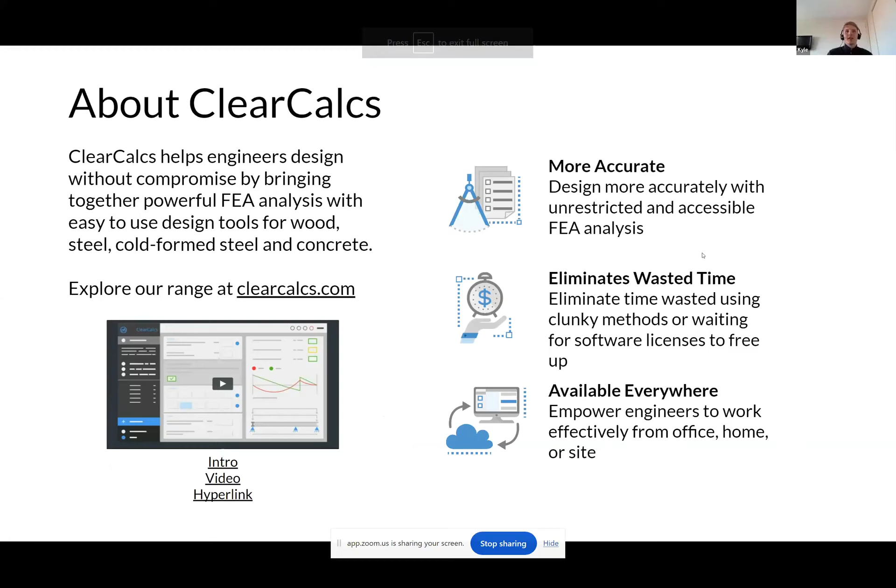So thanks everyone for tuning in. As I said, my name's Kyle, I'm a project manager with Aus Engineered. We've worked with ClearCalcs for about 18 months now, on a range of different sort of projects, and I've been using ClearCalcs. We've been using ClearCalcs at the company I work for about over a year now. And Ati sort of said, hey, why don't you share one of the projects you've used ClearCalcs on, and go through the design procedure you've done, and it might be useful for other people.

So enough about me, let's get into the presentation. For today's agenda, I'll start by introducing the project. A lot of builders and a lot of clients reach out, and it's always about adding space, renovation projects.

So whether they want to add a room, extend the property, add another story, knock out a wall to add more living space, it seems like with population density and things like that, there's going to be a lot more space addition projects coming up.

And this particular project that we worked on was a creative way to add space into a loft apartment, somewhere that it's often quite tricky to add space.

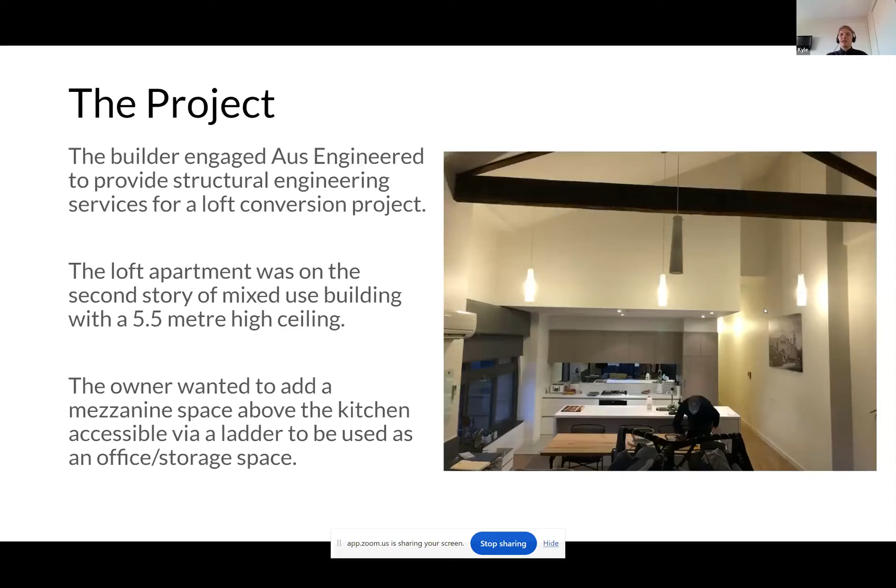So we were engaged by the builder quite early, so we were able to participate in the concept design. And so there was also an architect on board and a town planner as well. So as a team, everyone was involved in the concept design, which was really good.

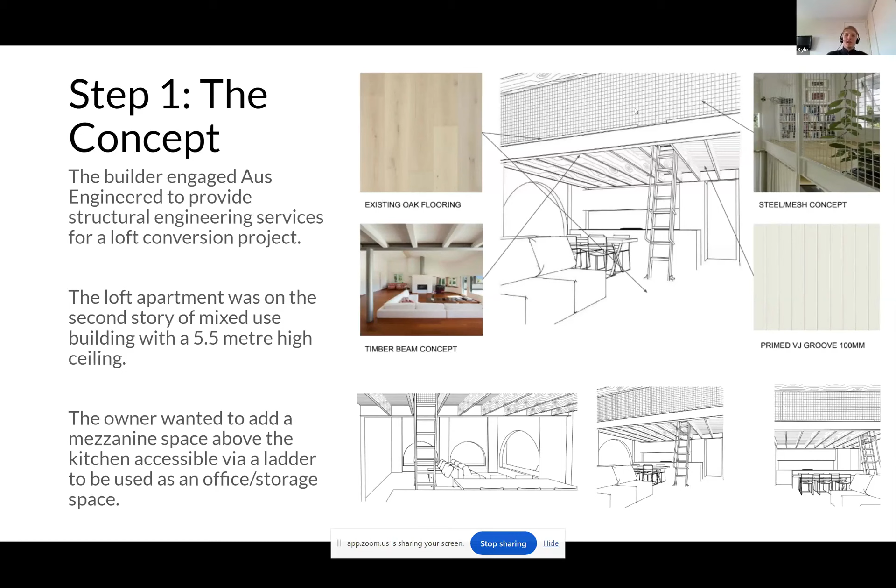So the next part, once we had a concept of what the client wanted, was to assess the information available. Often with these renovation projects, it can be really difficult to get good quality information about the existing structure.

Often buildings are quite old and the record keeping on them isn't great. And that's the same for commercial buildings. Even though they're managed by body corporates, often they change. The building will be managed by different body corporates over its life. And the as-built drawings for the structure aren't often maintained very well.

And often that can be a deal breaker for us when we take on a project like this, because there's inherently a lot of risk associated with modifying an existing structure.

So we engage the body corporate early to understand their requirement for private building works, because it does vary between body corporates. Often they'll have a procedure and a list of requirements that they need the builder, engineer, or architect to have, to be able to make those modifications, and then they'll list the documents they require for you to make modifications to that building.

Fortunately, in this case, we were able to secure existing structural and architectural drawings from the body corporate, which were very informative in the design.

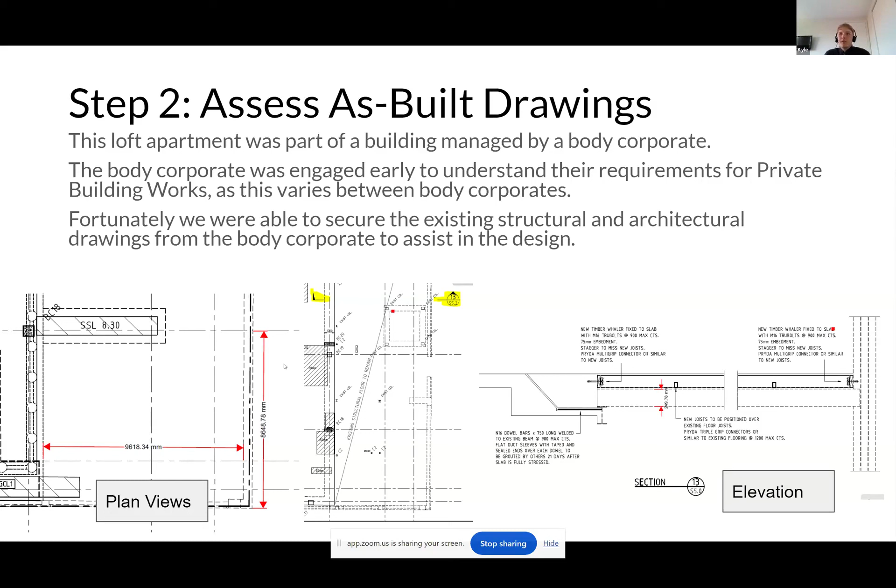So we were able to go digging and work out the span of the existing slab that the apartment was on, as well as the vertical columns and supporting members, their orientation, and based on the as-built drawings, assign a capacity to the slab, and work out whether it's even possible to add additional loads to the slab from adding in an additional space.

So once we had those drawings, we felt, and did some site investigation work, we felt quite confident that we could achieve the project, which was good.

Often, in a case where we wouldn't have these drawings, there are other methods you can do. You can go and conduct on-site measurements, look through the structural members, look through manholes. You can do non-destructive testing like scanning for reinforcement and things like that as well. I guess the challenge with those are that it's expensive, and often there's a lot of sunk cost that goes into those investigations.

And it's possible that you can't even achieve what the client wants. So it's really important to keep them informed, if you are going down that path of, okay, we've got no drawings, we need to verify what these members are, and if there's sufficient capacity, to keep them informed that we'll assign the capacity of the existing structure, but we can't guarantee that your renovation will be able to be facilitated. Because often, clients can get grumpy when you come back and say, here's the bill for all the investigation work, but sorry, we can't do your renovation. So it's just important to manage that relationship and be clear about the risks associated with any project.

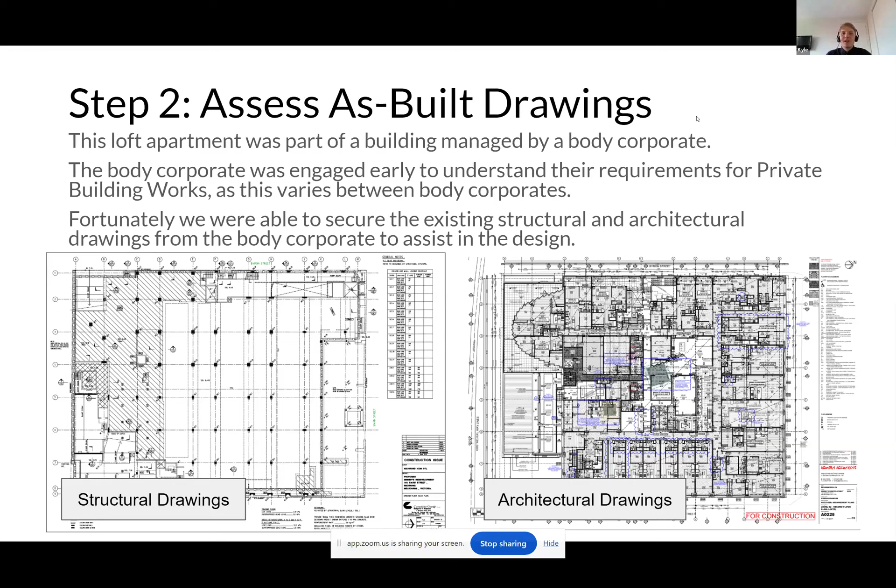It's important early as well, before you tuck into the design, to consider council, shire, or planning laws. Depending on the use case for the space being added, planning permits requirements can be triggered. Be sure to consult with the local council about the project and engage a town planner to assist with any required planning applications. We don't do any town planning ourselves. We leave that for the experts, and ensure they're engaged for the project when we feel they're required, in consultation with the builder and the client.

Often adding storage space such as non-habitable rooms can be exempt from planning permits depending on where they are, but the loads required for storage calculation as per AS 1170 are often much greater than general use spaces. So that's just some important things to consider depending on the use case of the space.

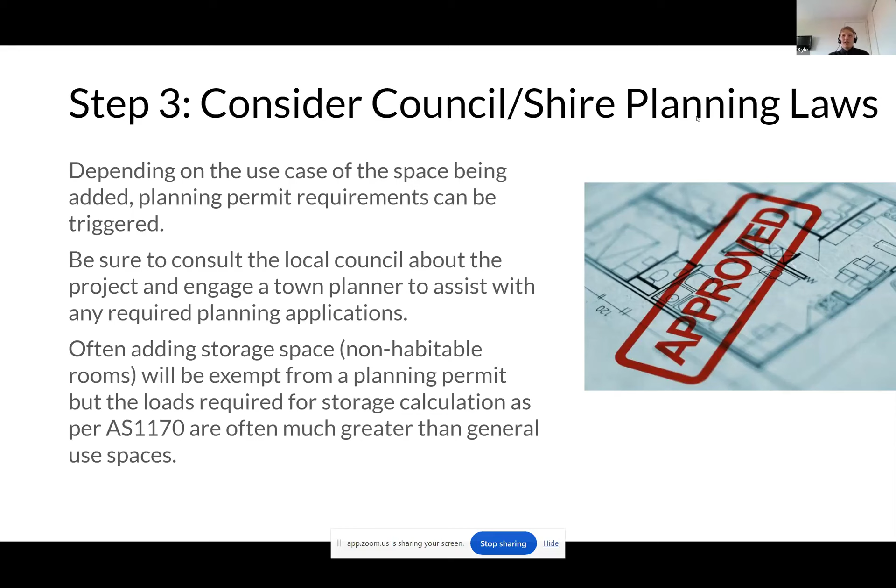So once there was confidence that there was sufficient structural capacity that the planning laws would permit the construction, a qualified architect was engaged to draw up some plans. And we received these draft copies of what beams and columns required specifications by the engineer.

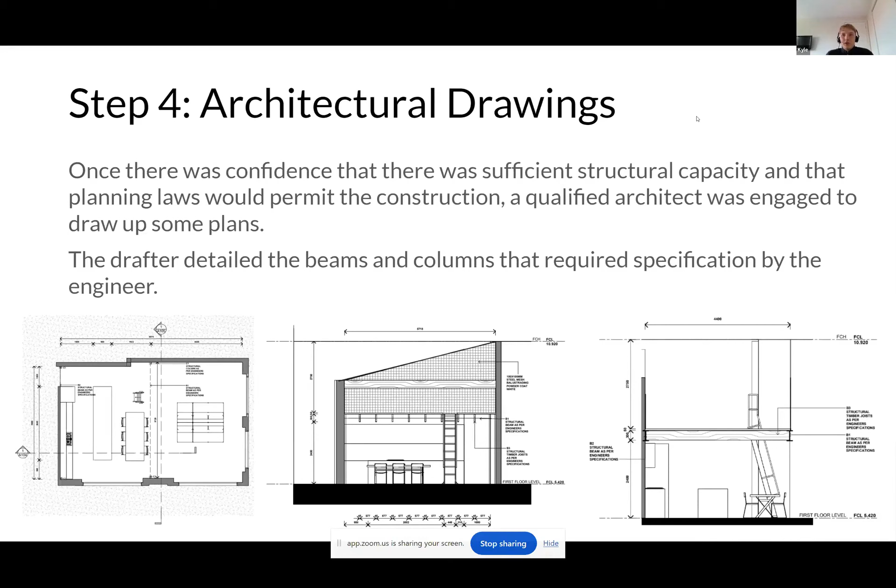So then in terms of going into the actual design procedure for the members, determine the loading requirements, which stems from the use case of the space, which is quite easy, just using AS 1170.1.

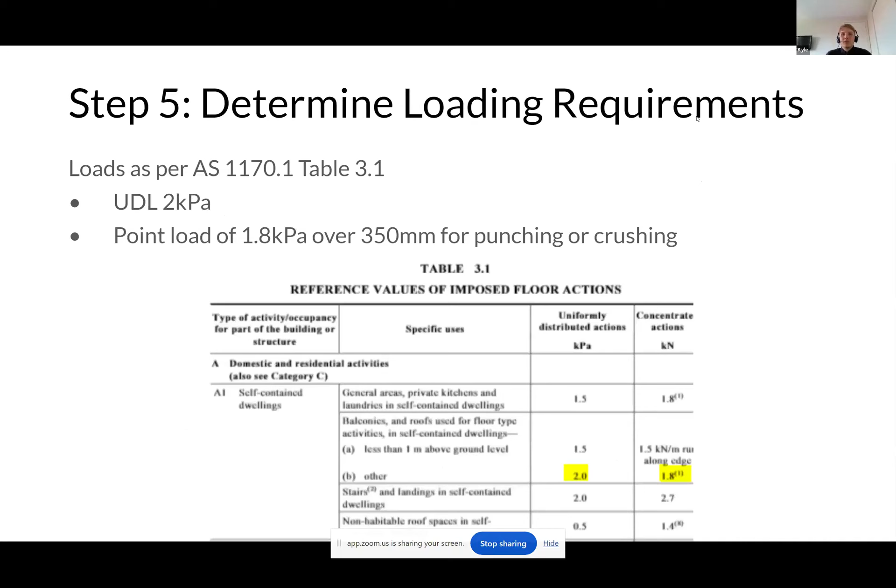And then we jumped into designing the primary beams first. So we did that using the tributary width of the new mezzanine area and calculating the load that would be attributable to the new primary beam for the new space.

That allowed us to specify the loads into this ClearCalcs steel beam calculator, which was then used to find the most structurally efficient member. I'm happy to show you our ClearCalcs output.

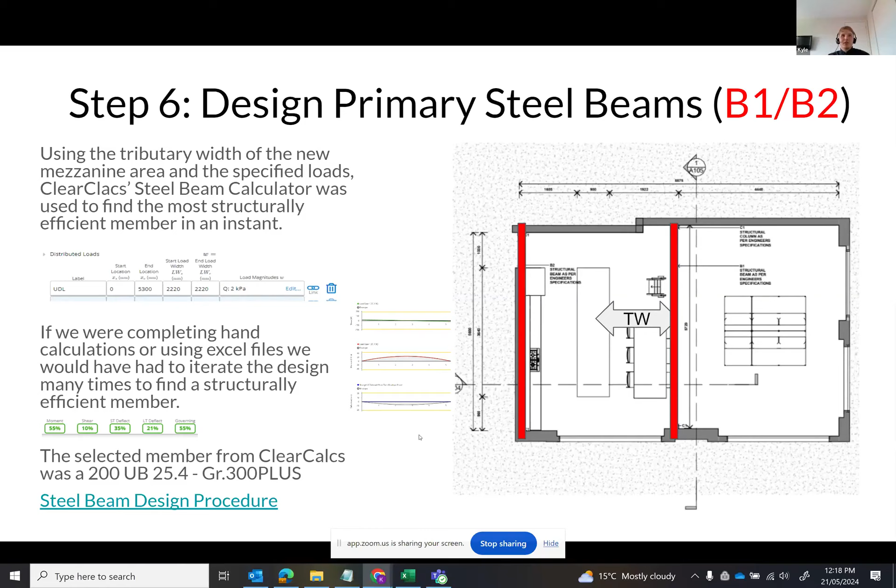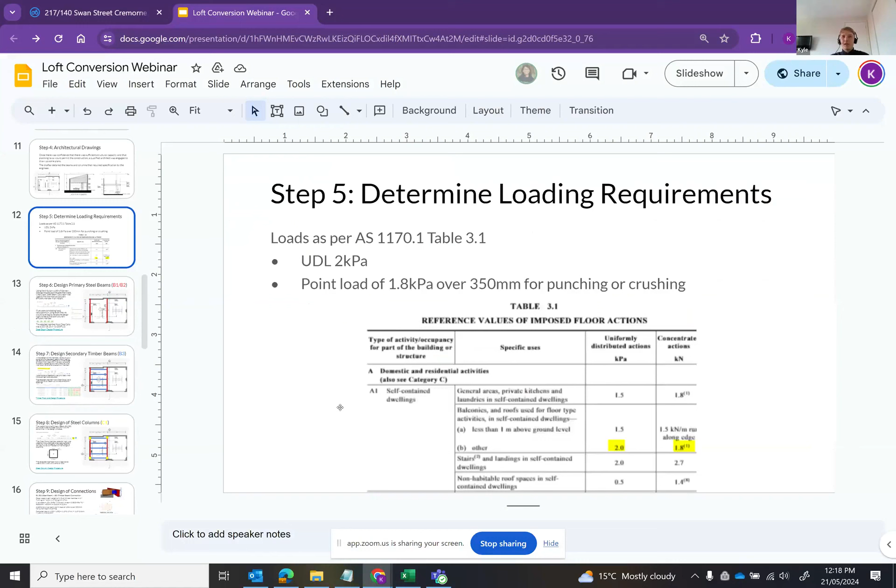Just to note, there is a link down the bottom of these slides that will be sent around that goes into detail the design procedure for steel beams for each member that we talk about. I'm not going to cover each of them in detail just due to time, but those links are pretty useful. They're being prepared by ClearCalcs, so they're very good to follow.

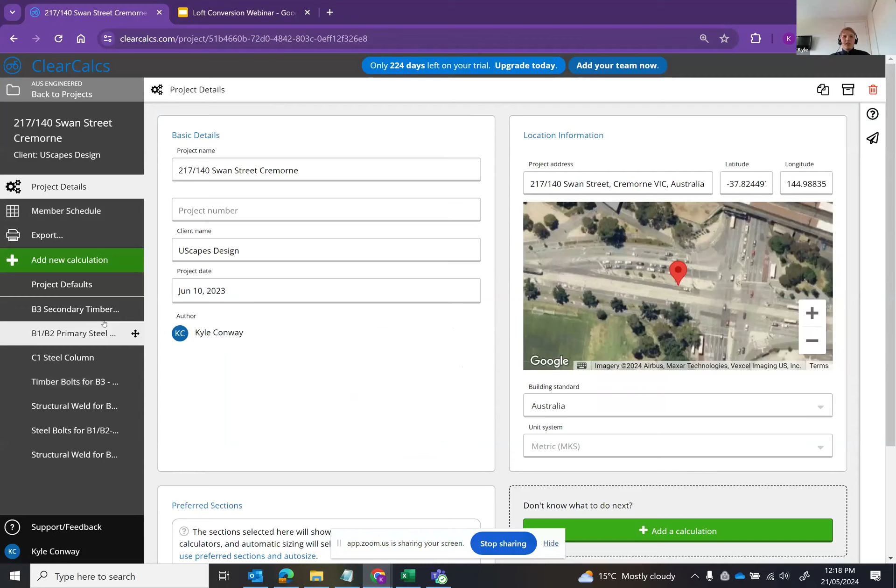So I'll just jump in. This was our project that we created. We had the address in, the client, and then we have all of our calculators in here that help us design these members much more efficiently.

So the member in question was the primary steel beam, or B1/B2. We were able to come straight in, input the dimensions from the drawings. We were able to input the dimensions of the beam that was required.

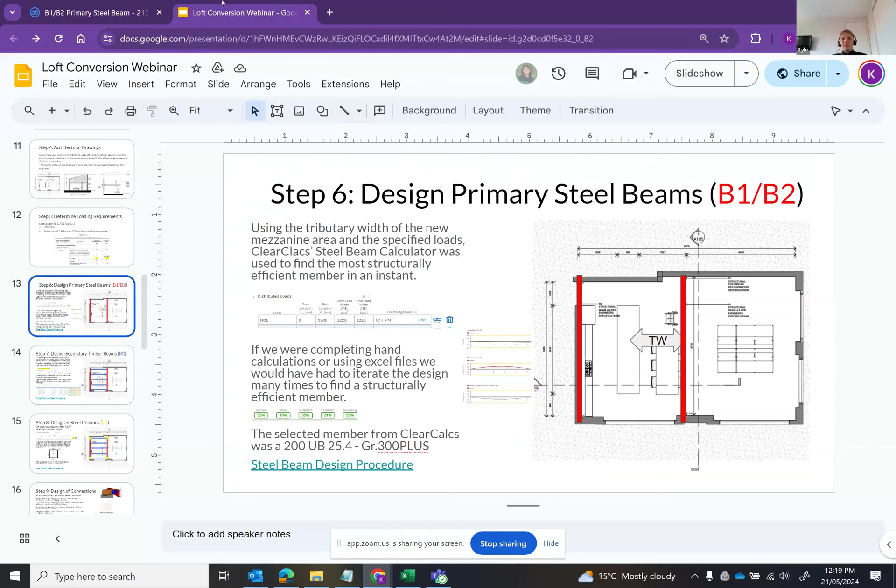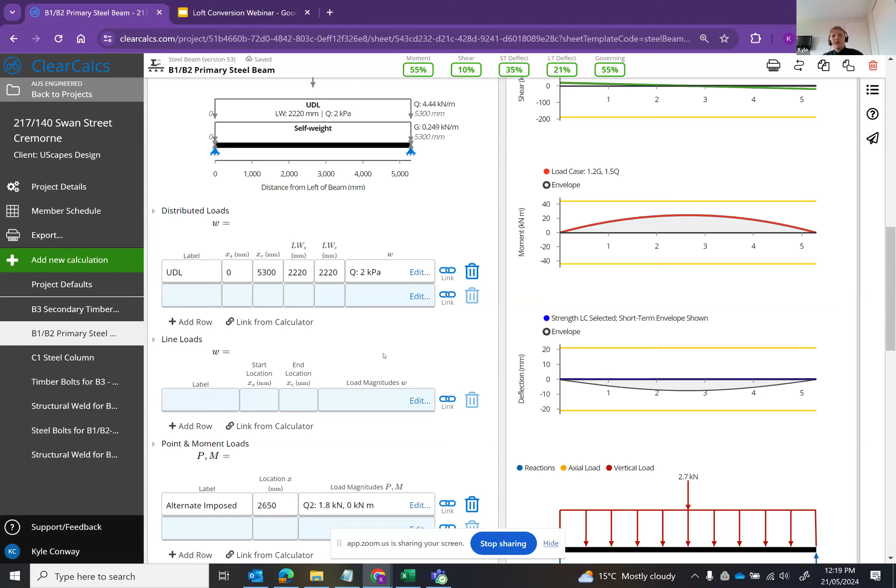So in terms of span, the length of bearing that the beam would have, and also input the loads that were determined according to AS 1170.1. We could also put in the tributary width of these loads, which is really convenient rather than performing all those hand calculations for those distributed loads, and also add in point and moment loads, as well as the beam orientation. So quite easy to input.

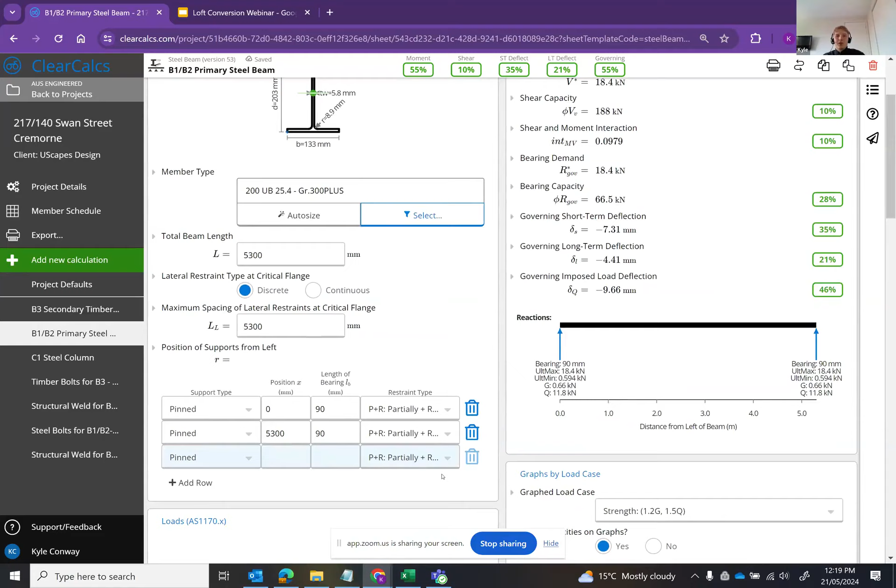It spits out a nice little diagram here that shows what loads are applied to the beam. And then we also go through and check all the other parameters for the beam calculation. Most of them can be left as default if you set up your project defaults according to Australian standards. But it's important just to check each of them and ensure that they are suitable for this beam.

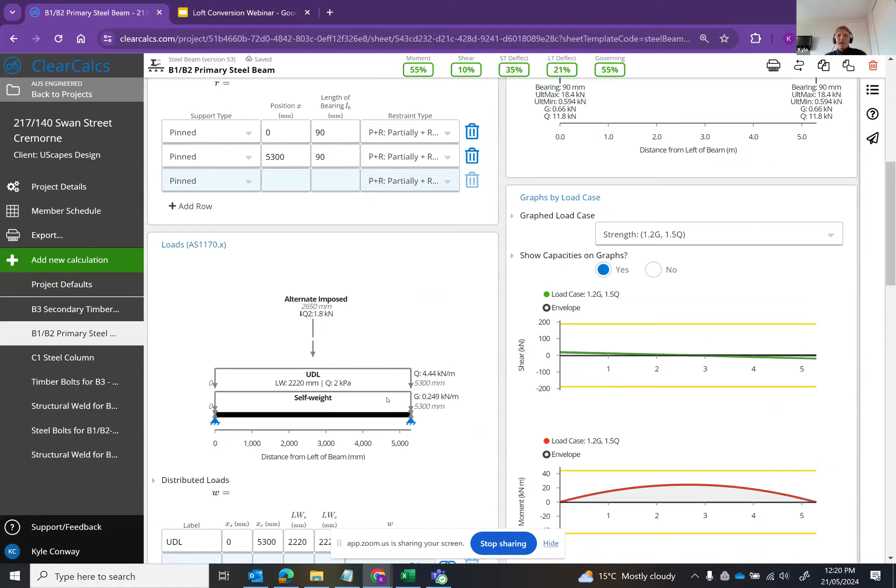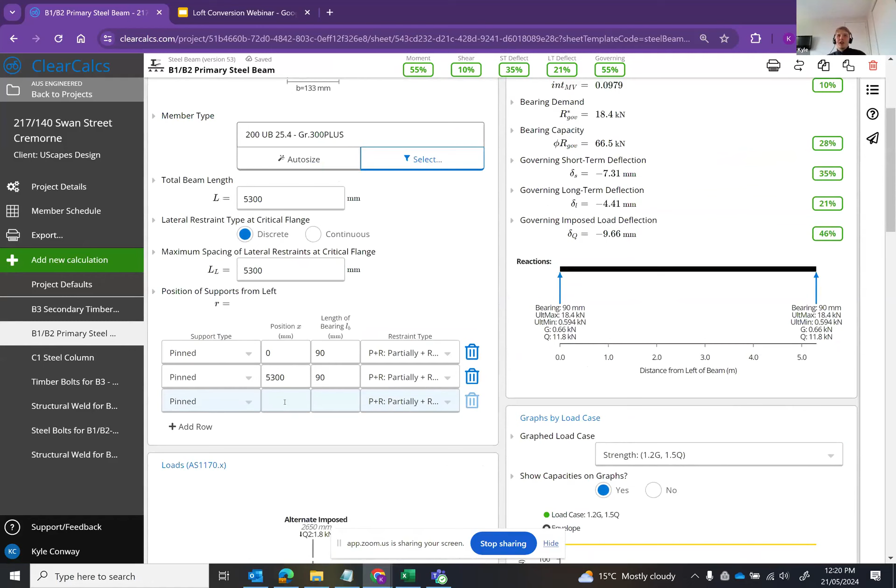What we really like about ClearCalcs is you put all the inputs in and you get instant feedback through the traffic lights. Depending on the utilization of the beam under the loads input, you'll get a green if the beam's adequate, orange if it's nearing utilization, or red if it's overutilized. You can go through and change parameters, and it'll instantly update the utilization percentages via the traffic light system. We find that really fast.

If I go through to the secondary beam - the reason we designed the primary beam first was because in order to achieve the vision the client wanted, the secondary beams needed to bear on the bottom flange of the universal primary beam, sitting flush against the web and bearing on that bottom flange. This was for a few reasons: one, for aesthetics, and two, they didn't want too much reduction in ceiling height. So that was why the primary beam was designed first, and once that was sized, we knew the secondary beam couldn't have a depth greater than 200 millimeters to ensure it could fit into the flange of the primary beam B1.

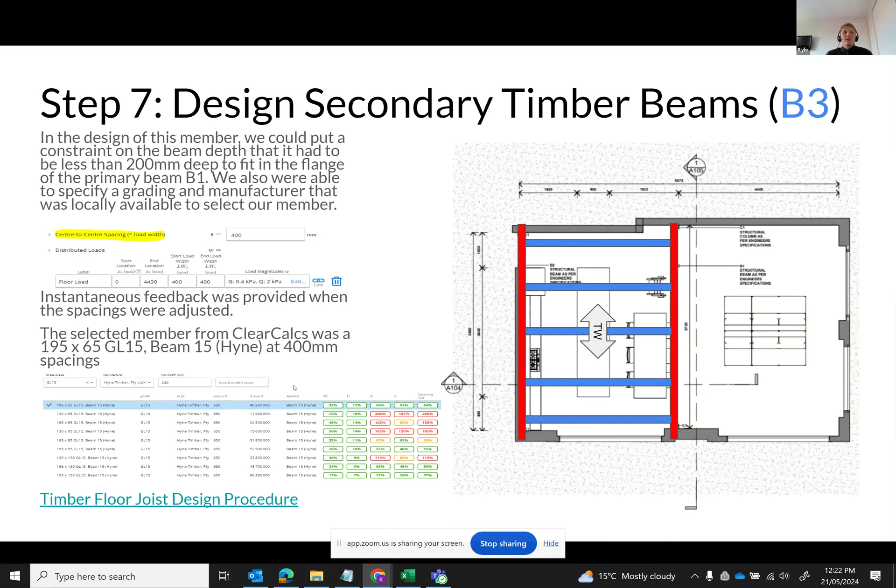I'll jump into ClearCalcs. This was for the secondary beam design, which was a timber beam. Again, we went through and input all the loading conditions for this beam, and the tributary width of that loading.

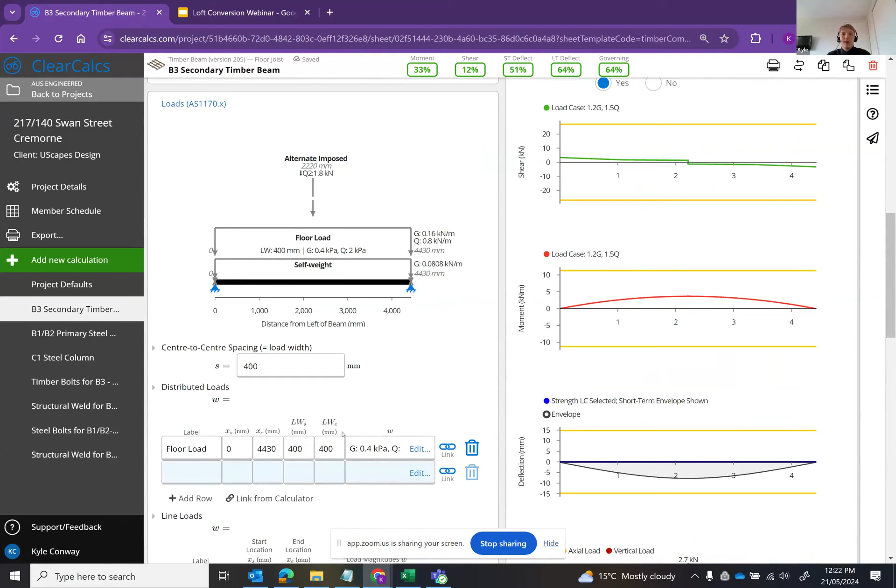Using the ClearCalcs member selector tool, which we find to be really useful, we're able to select from a range of different manufacturers, stress grades, and specify maximum depths and widths for the member. That really came in handy here.

So when we are engaged by a builder, we'll always ask: do you have a preference on timber or steel for the beam? Do you have a preference on manufacturer? Often they do, because they'll have existing relationships with suppliers - they might get discounts through a certain supplier for a certain product, or it might just be a preference because they're able to procure it close to site.

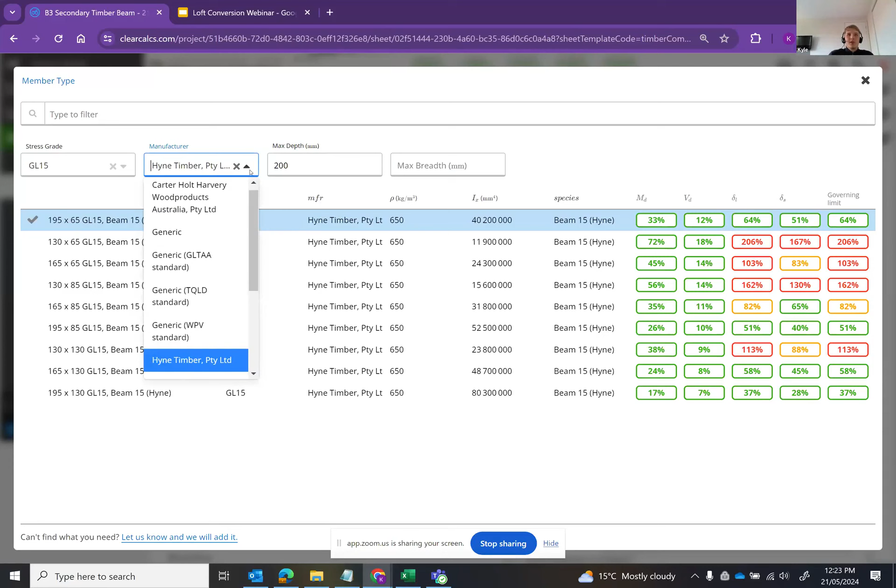So straight away we're able to filter on a range of manufacturers of Australian timber beams, which is fantastic. The builder said they were interested in using a member from Hyne, and we knew we needed a glulam member. So just by inputting some filters, we were able to come up with a suitable design. Back to what I was saying about the secondary beam needing to fit into the web of the primary beam - you can see here we're able to specify a max depth of 200 millimeters, and that automatically filtered on beams that would be suitable dimensions to achieve that connection.

Then you get instantaneous feedback about what members are going to be suitable, and what utilizations they achieve. So you can ensure that you achieve both an efficient design and a safe design.

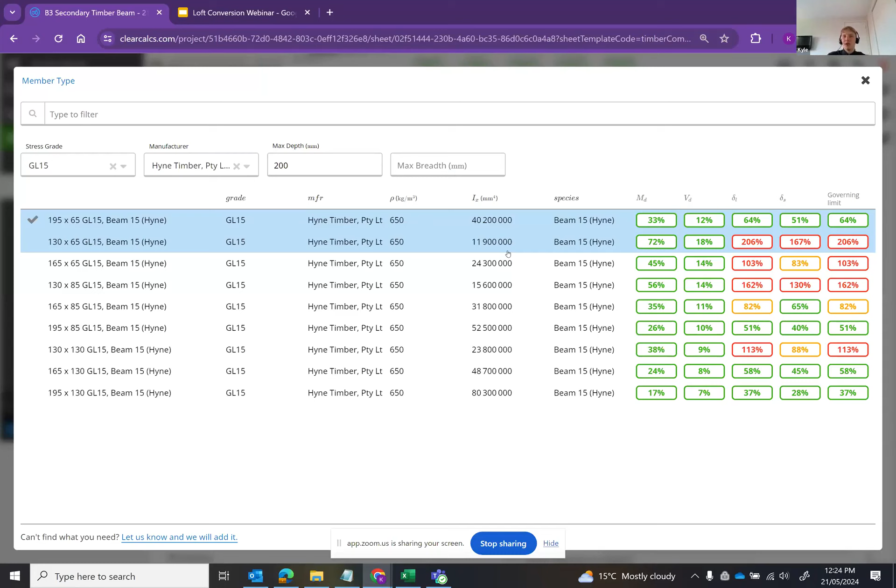And if we were doing this through Excel spreadsheets or something like that, it would take a lot of time, because you need to input the dimensions for each beam and the section properties for each beam, trial that - oh, that one doesn't work - you'll trial another one. Whereas with this, you can get the most efficient member really fast, and you're able to make design changes quite quickly, whether it might be the length of bearing area that you might want to change.

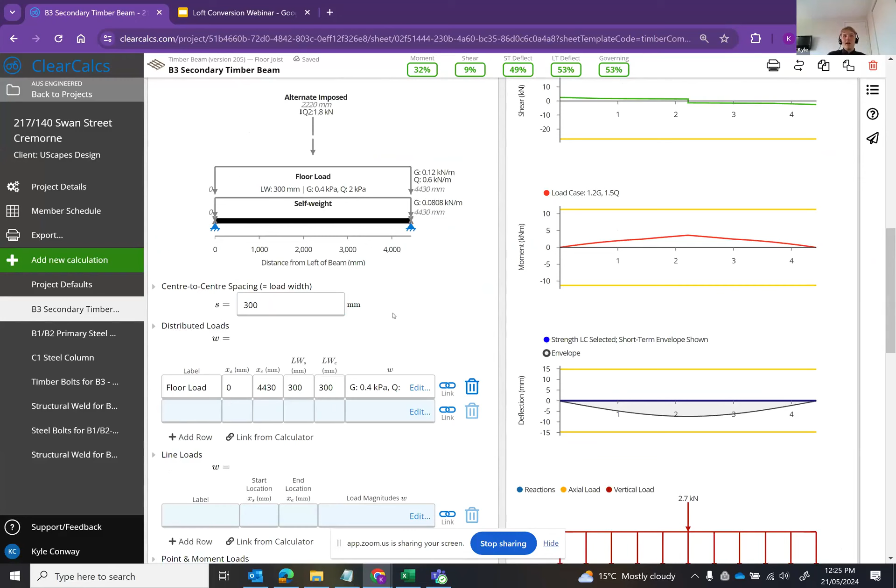It could be the center to center spacing that you might want to change - you might want to change that to 300 due to certain site constraints, or 500, and you'll be able to get instant feedback on the result of those changes. So it enables you to be really efficient, both in time and structurally efficient in the design.

Keep going - again, there's a link down the bottom of that slide for the design procedure.

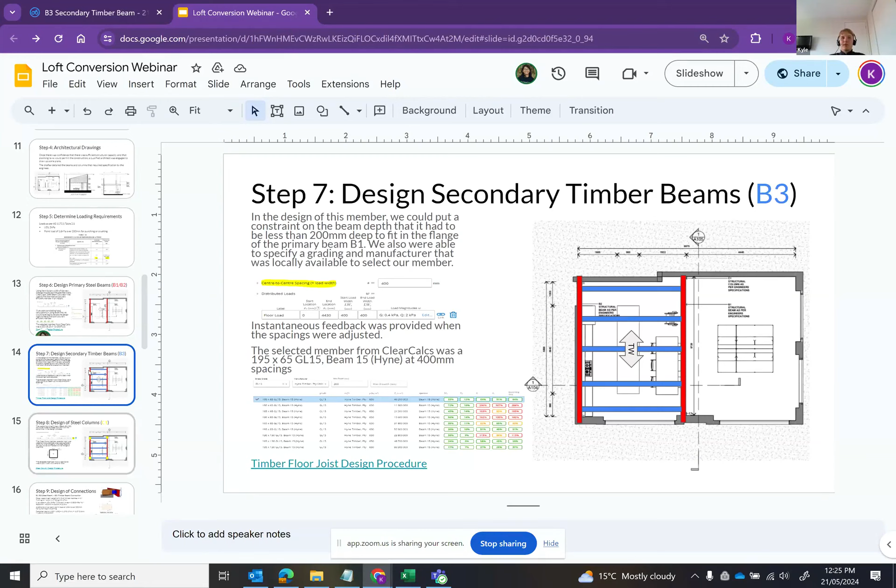So for the design of the steel columns, again, we had some section constraints. We needed to attach the primary beams to the columns, and as a result of the primary beam being the size that was specified, we had to ensure the column had a flange that was sufficient width for that connection.

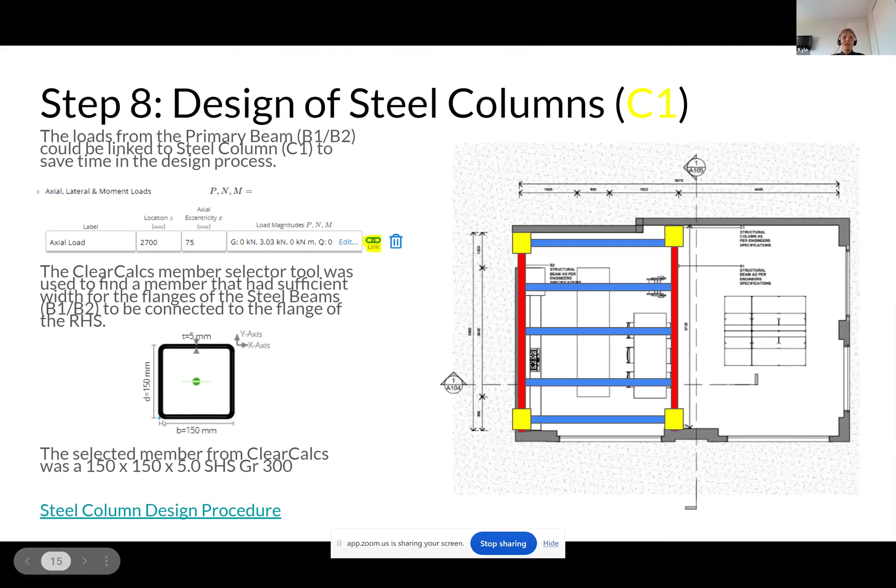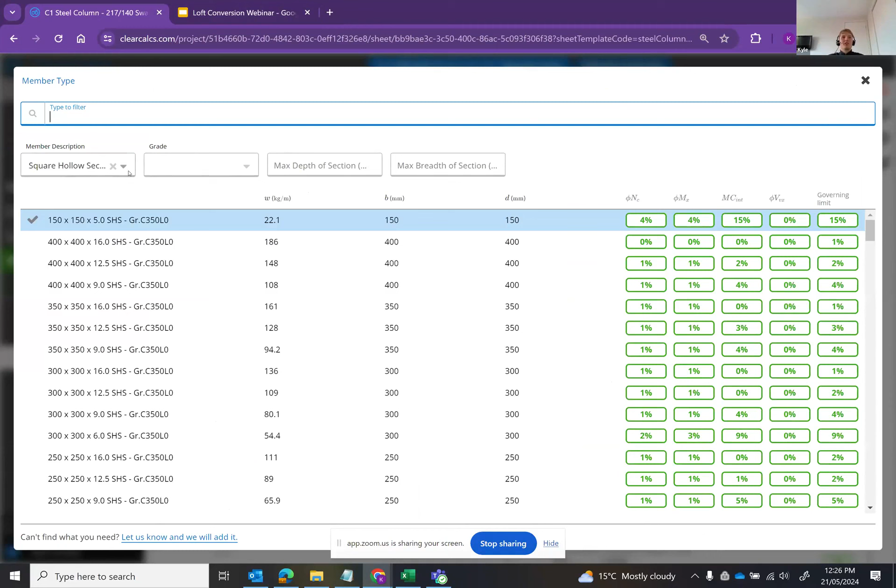So if we just jump back into ClearCalcs - just load, yep, perfect. We were able to, again in the member selector tool, specify the max depths and widths of sections, any grading, and the dimensions. We were interested in a square hollow section to achieve this connection, but there's a range of other sections that could have been used - just to achieve the constructible connection, we went for the square hollow section.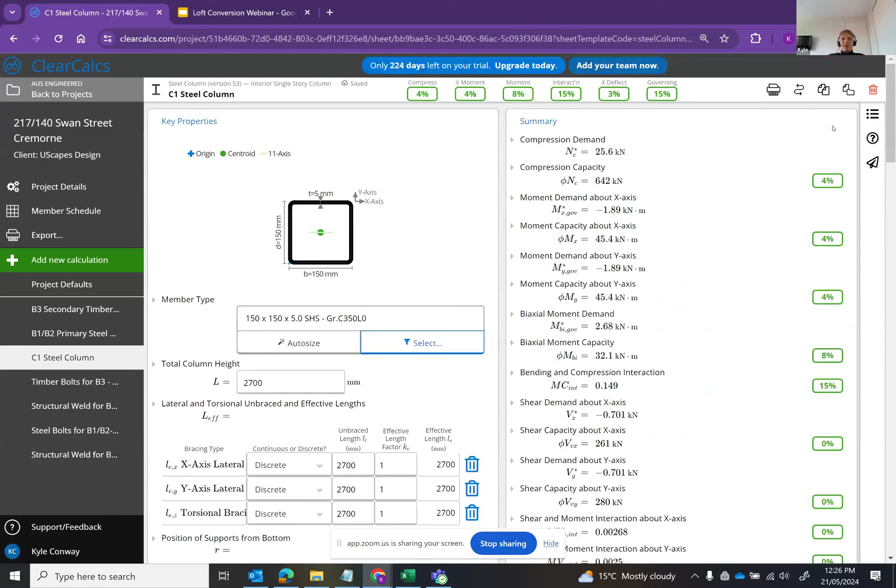You obviously get the traffic light capacity feedback right away because of the dimensions we required for the column to achieve the connection. We ended up with a fairly structurally inefficient member, but one that was easily constructible on site, and a connection that's easily constructible on site.

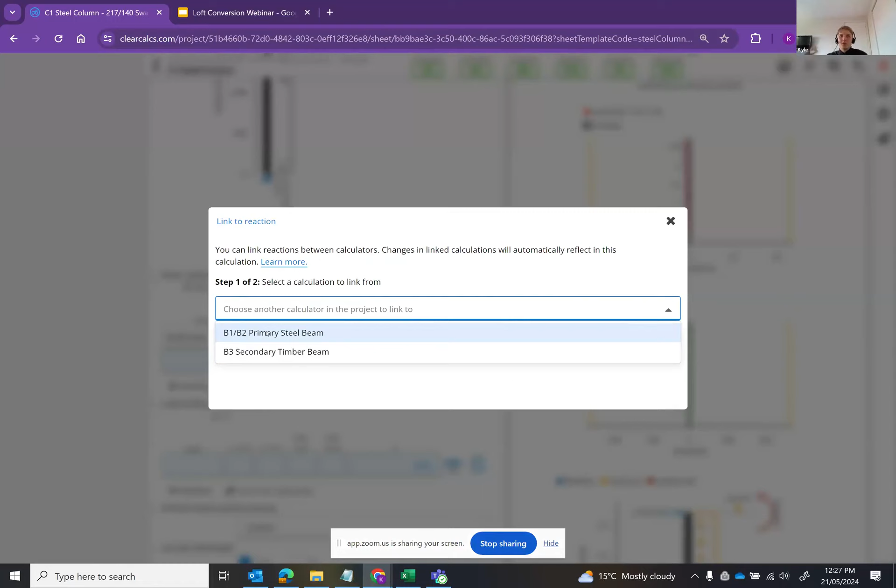So that was good. Another feature that's quite good with ClearCalcs is you can link loads. You can see we've got our other beams in here that are going to be passing load through to the column, and you're able to link those beams to the column to ensure that the column is picking up the loads from those beams, rather than performing heaps of calculations by hand or using spreadsheets. That's definitely a big time saver.

In terms of the design of the connection, this is what I was talking about, where we had the timber beam bearing on, slotted into the web of the primary beam, and the connection we were trying to achieve there. Not a standard connection we would go for, but one that would result in the least reduction in ceiling height, which was obviously a key specification from the client.

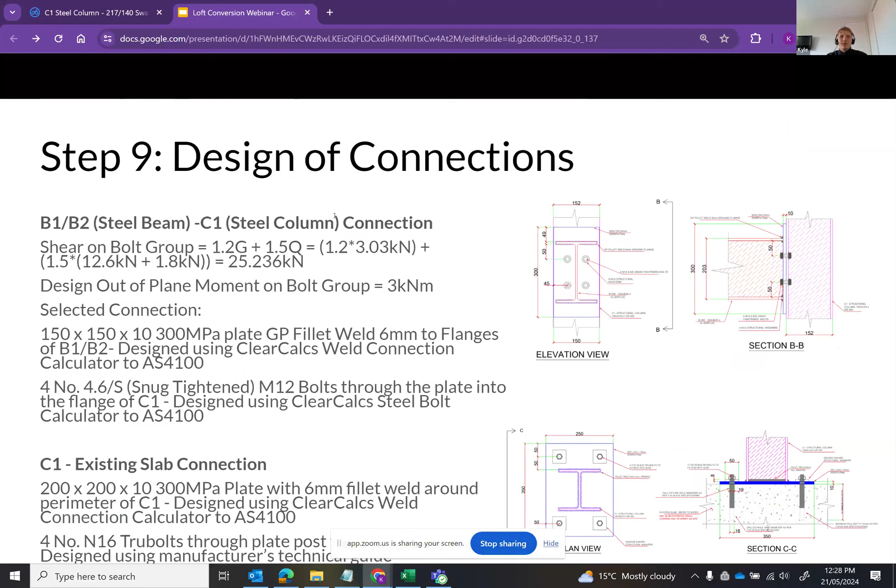Based on this concept for the connection design, we're again able to use ClearCalcs. Let me just show you in ClearCalcs. We were able to verify that the bolt sizes specified would be sufficient, and that the weld sizes would be sufficient as well.

That is a real big time saver for us, just being able to verify those bolts and the length of the weld and the type of the weld and the thickness of the fillet of the weld. Just really fast, punch it into ClearCalcs and get an instant response.

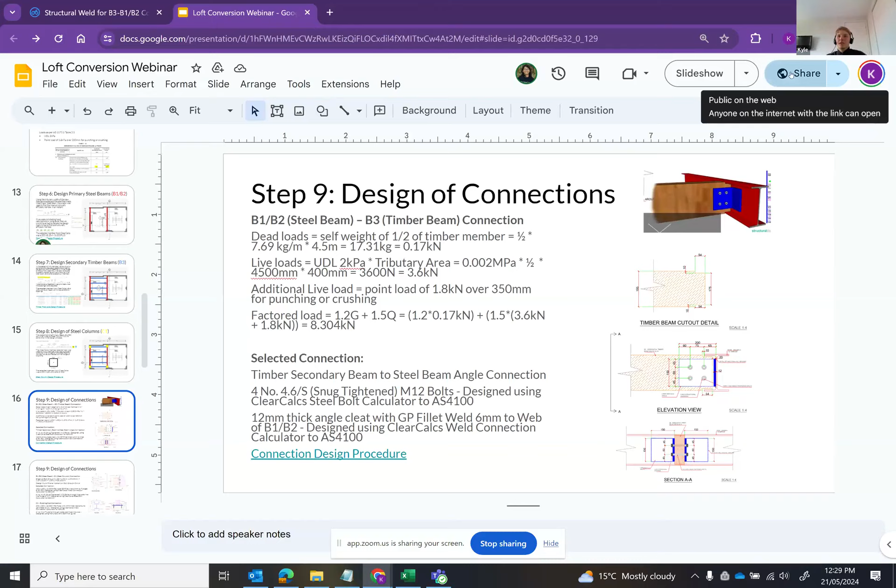Standards are updating all the time, and so we found that often the spreadsheets we were using for our designs would become out of date quite quickly. Whereas ClearCalcs gets updated with each revision of Australian standards, so we can feel confident in our design that we are in accordance with the latest standards, and not having to back calculate changes into any Excel spreadsheets or anything like that.

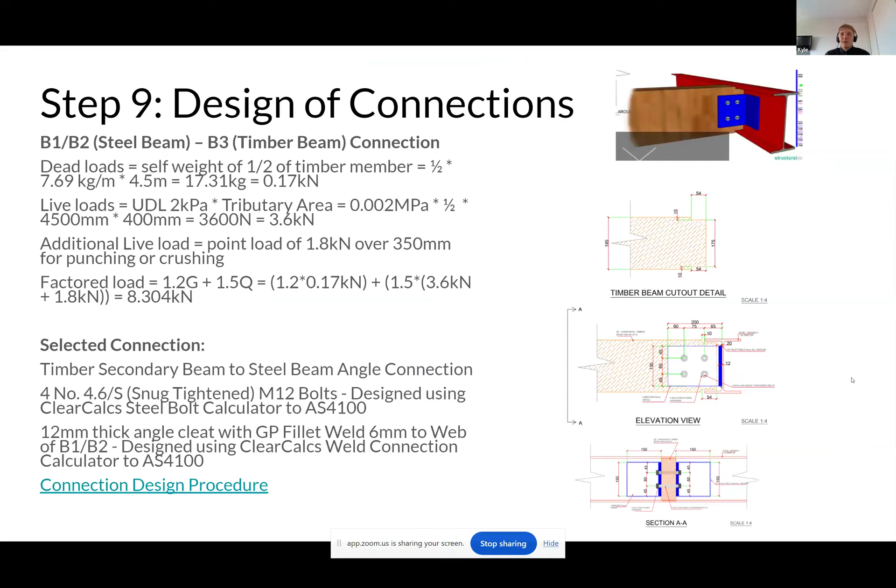So again, we had three connections to design. There was the steel beam, the timber beam to the steel beam. Then we had the steel beam to the column, and then we had the connection into the existing slab, which was designed using a manufacturer's proprietary product. It's essentially Trubolts, and we used their design calculator for that one.

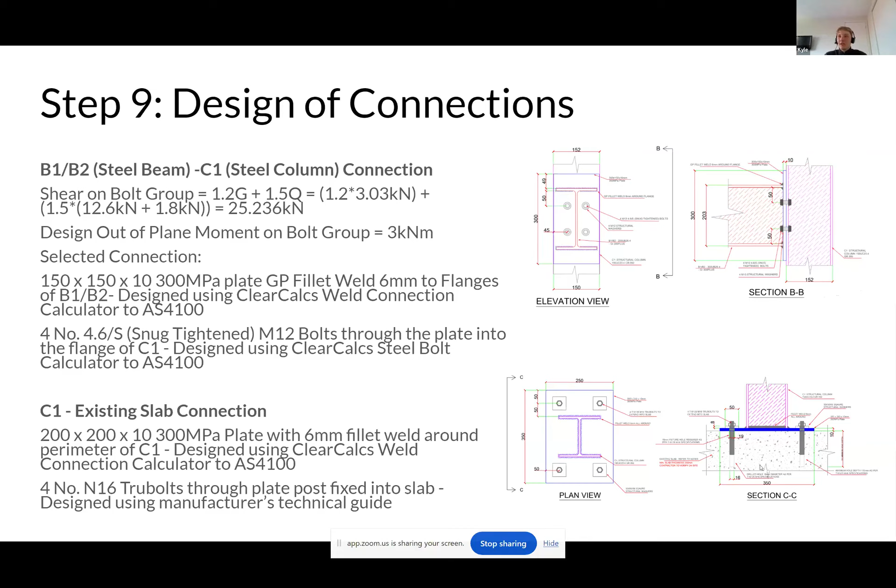So jumping to the next step, we had our drafting. Once we were able to specify the beam sizes, spacings, and connection details, we were able to update the drawings for the drafter to ultimately reflect on the final drawings, and specify some general notes for construction, a key one being verify the as-builts on site, because the whole design is contingent on assumptions in those.

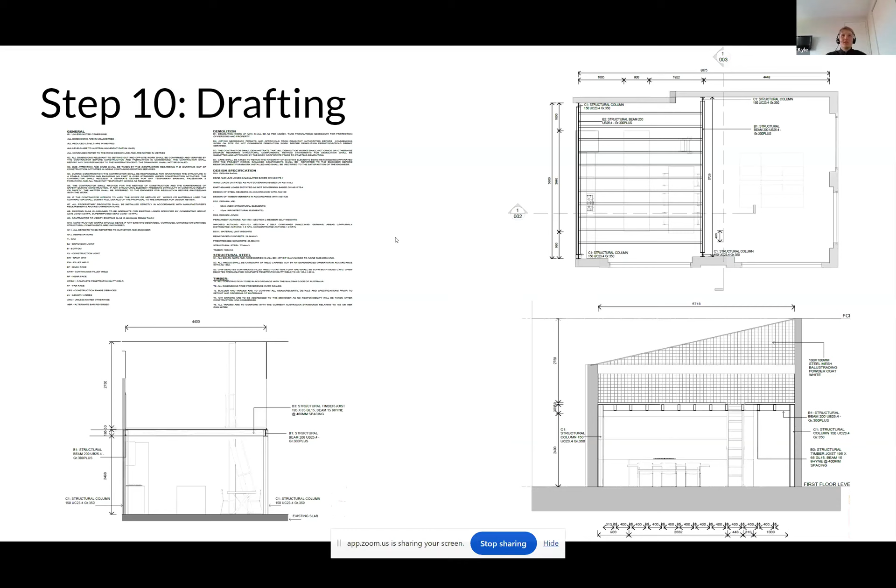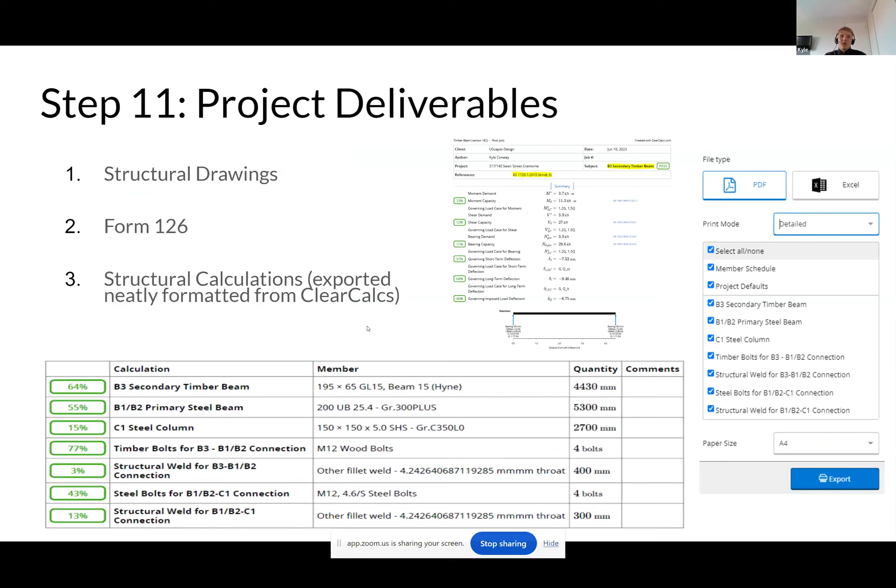We jumped to our project deliverables. Being the structural engineer, we issued structural drawings, Form 126, and the structural calculations, which were exported neatly formatted from ClearCalcs. I'll just show that step, because that's a really key step for us.

In Victoria, we're required to provide this Form 126 and the calculations as part of the design to ensure compliance. Often having to submit calculations can be tricky, and it's tough to neatly format them in a way that's usable. But using the export tool in ClearCalcs, you can automatically export them.

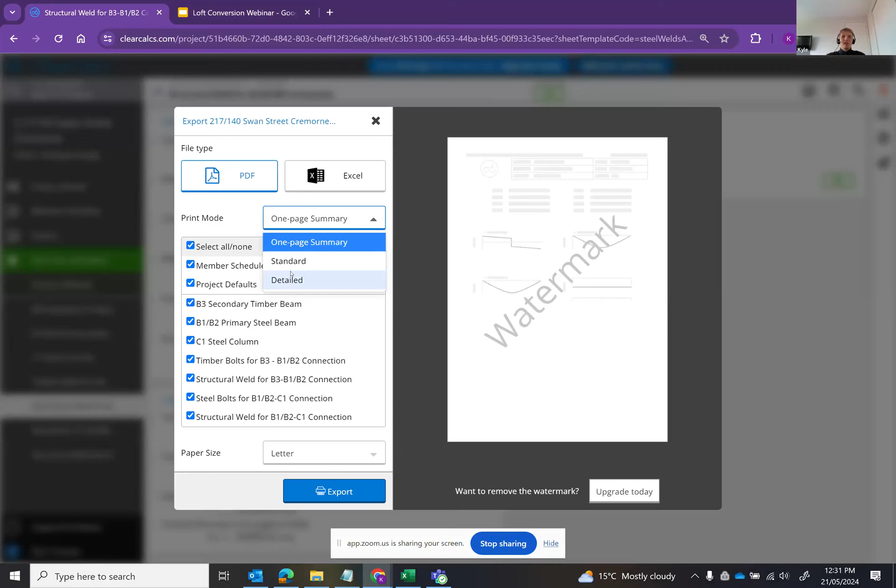I usually go for detailed, because it gives every single design assumption in detail. You can export all the calculations, and it really walks through the method for each of those. Usually chuck it in A4. It will talk about the project defaults, and give a member schedule summary that can be useful for the builder when they're ordering materials. It just summarizes what members are used, and then all the detail for each separate calculation, exported either in PDF or Excel, which is again a massive time saver rather than having to type up calculations for that requirement.

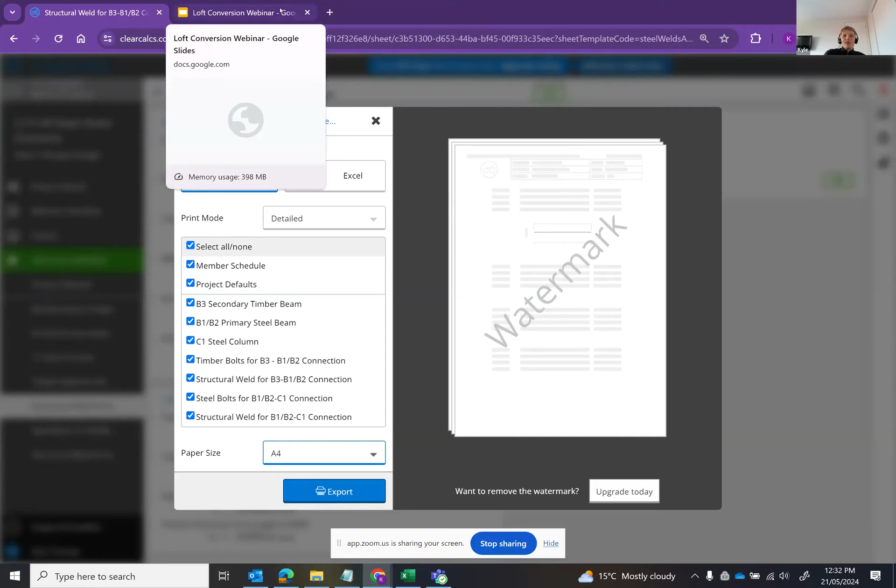So there's a little snip of part of the report that was exported. It has the beam name, details the Australian standard reference, and then walks through the calculations that the ClearCalcs calculator has used to determine that member to be adequate.

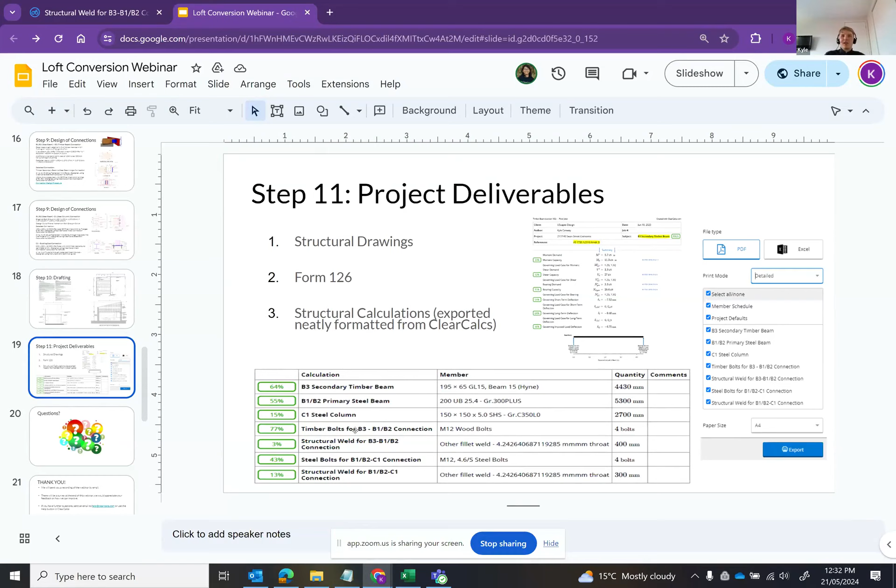And that's really useful as well to give to the client in future. They might want to make additional changes to the structure, and if they've got that handy, they can provide that to the next engineer, which can greatly save them time. So it's a really great feature.

That's all for the presentation. Did anyone have any questions?